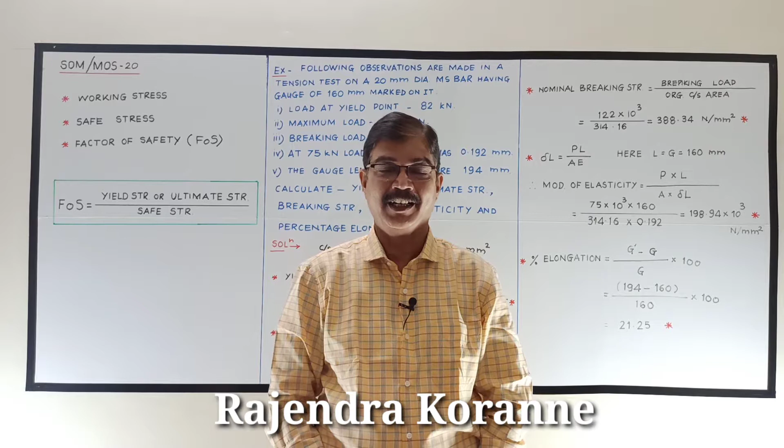In the previous video, we saw the stress strain curve for mild steel, cast iron and for deformed bar.

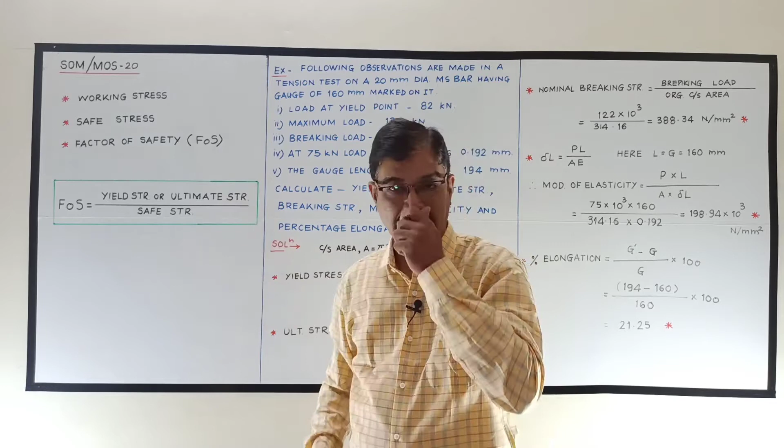Let us first see what we mean by working stress. The stress induced in the material of the member due to the actual load acting on it is known as working stress.

Now what is the safe stress? It is the stress in the material which can be withstood without causing any permanent deformation in that material. It means that safe stress shall not exceed the limit of proportionality or proportional limit.

As it is very difficult to observe the limit of proportionality accurately, the safe stress is based on yield stress or ultimate stress.

Now let us see what we mean by factor of safety. To calculate the safe stress, the ultimate stress or the yield stress is divided by a certain number, and that number is known as factor of safety. Therefore, the factor of safety is defined as the ratio of yield stress or ultimate stress to the safe stress. So FOS, that is factor of safety, equals yield stress or ultimate stress upon safe stress.

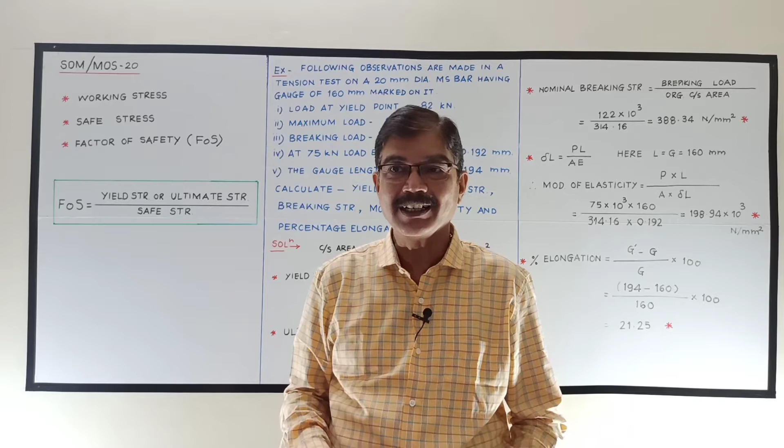So whatever may be the capacity of the member, it is always loaded such that the stress will be within the limit of proportionality. This is a very important aspect as far as design is concerned.

Now let us solve one example to understand deeply what is stress strain curve. Let us take the example: following observations are made in a tension test on a 20 mm diameter mild steel bar having gauge length of 160 mm marked on it.

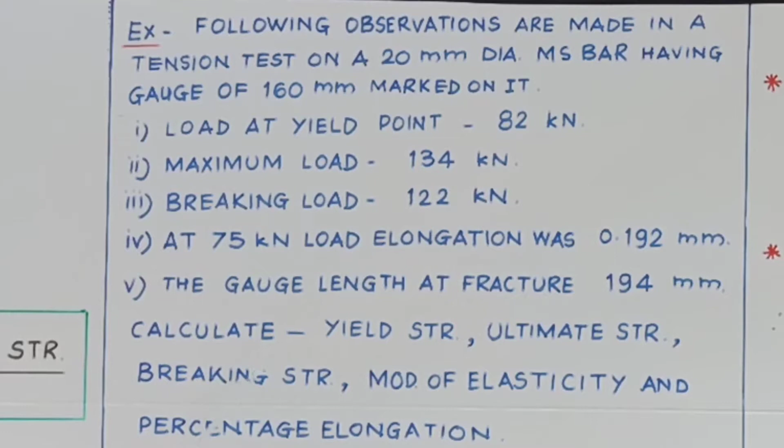Now what are the observations? Load at yield point 82 kilonewton, maximum load 134 kilonewton, breaking load 122 kilonewton. At 75 kilonewton load, elongation was 0.192 mm. The gauge length at fracture after breaking is 194 mm. We have to calculate yield stress, ultimate stress, breaking stress, modulus of elasticity and percentage elongation.

Now with the help of this example, you can very easily see how many loads are given here. 4 loads are given. When the load is applied gradually, the first load which will be reached will be 75 kilonewton, and at that load the elongation was observed. This particular observation will be very much useful to find out modulus of elasticity.

Then it will come as 82 kilonewton, that is load at yield point. This is before the proportional limit, and this is the yield point. Then 134 is maximum, and then the load will decrease.

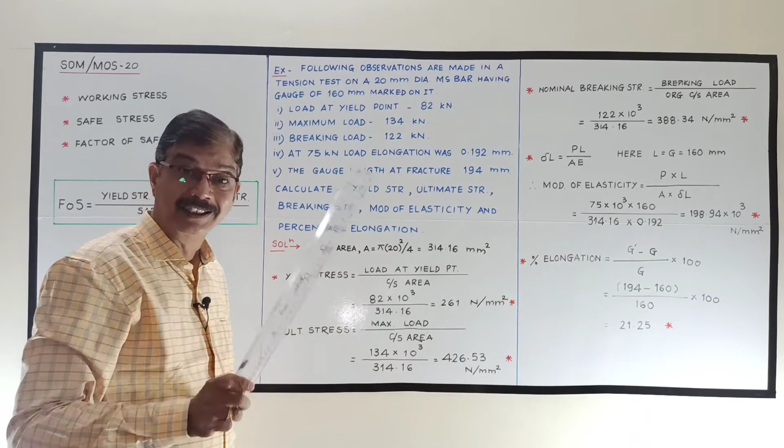This is a very known fact that breaking load is always less than maximum load. We saw this because once ultimate load is reached, the material starts reducing in cross section, thereby for further elongation it requires less load, and ultimately it breaks at a load which is less than the maximum load.

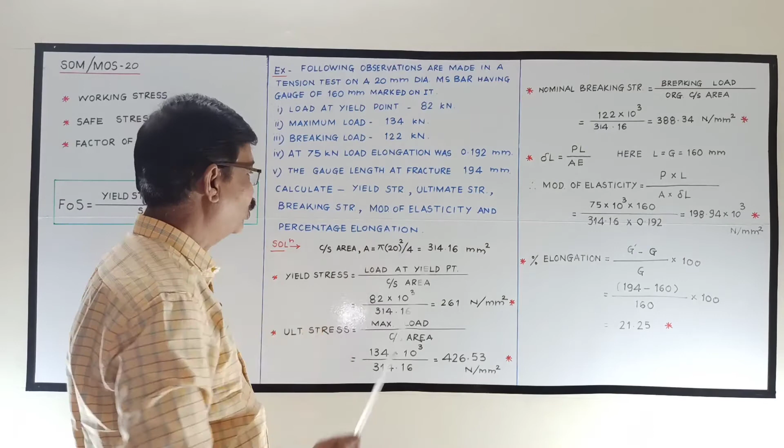Do you understand? Okay, now we have to find out so many things here. What are the things given? Original diameter is given as 20 mm, 160 mm gauge length, that is original gauge length. This is load at yield point, this is ultimate load, this is breaking load.

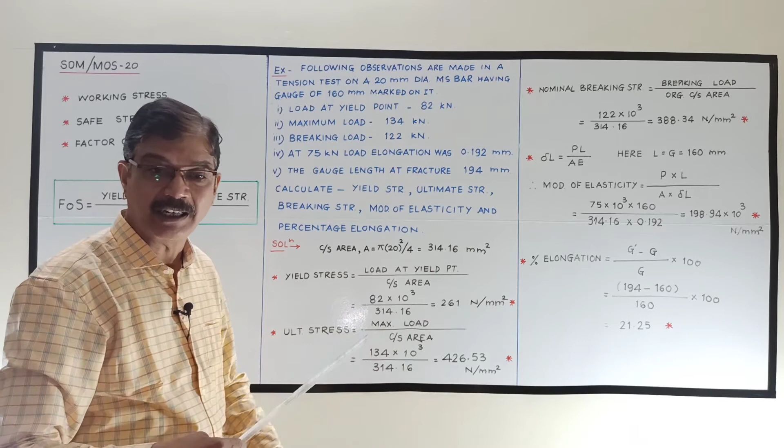For this particular load, elongation is given, so this observation is useful to find out modulus of elasticity, and final gauge length is given as 194 mm. After breaking, if you temporarily rejoin them, you can measure that G dash. So let us find out the things one by one.

Let us first find out the cross-sectional area, that is original cross-sectional area, pi d square by 4. Put the value of d as 20 and you will find that it is 314.16 mm square.

Now let us calculate yield stress. What do we mean by yield stress? Load at yield point divided by original cross-sectional area. Load at yield point is 82 into 10 raised to 3, for converting into Newton, divided by 314.16. On a scientific calculator, you will get that value as 261 Newton per mm square.

Now ultimate stress. What is ultimate stress? It is ultimate load, that is maximum load, upon original cross-sectional area. Maximum load is 134 kilonewton, divided by cross-sectional area 314.16, and this comes out to be 426.53 Newton per mm square.

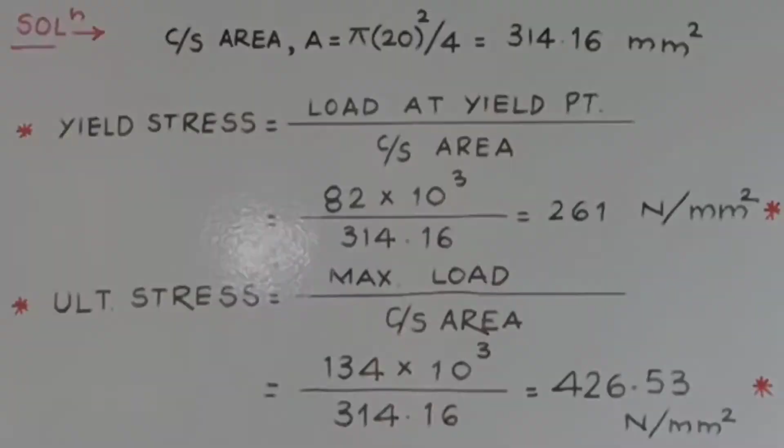Now the third thing we have to calculate is breaking stress. Breaking stress is of two types: actual breaking stress and nominal breaking stress. For actual breaking stress, you must be given the final diameter after fracture. It is not given, so we cannot calculate reduced area.

So in this problem, you are expected to calculate nominal breaking stress, which is breaking load divided by original cross-sectional area. Breaking load is given as 122 kilonewton. So 122 into 10 raised to 3, to convert in Newton, divided by 314.16, comes out to be 388.34 Newton per mm square.

Here you can easily see that the stress at which the specimen breaks is less than ultimate stress, because it is calculated using original cross-sectional area. If you take the reduced cross-sectional area here, this will be much more than ultimate stress.

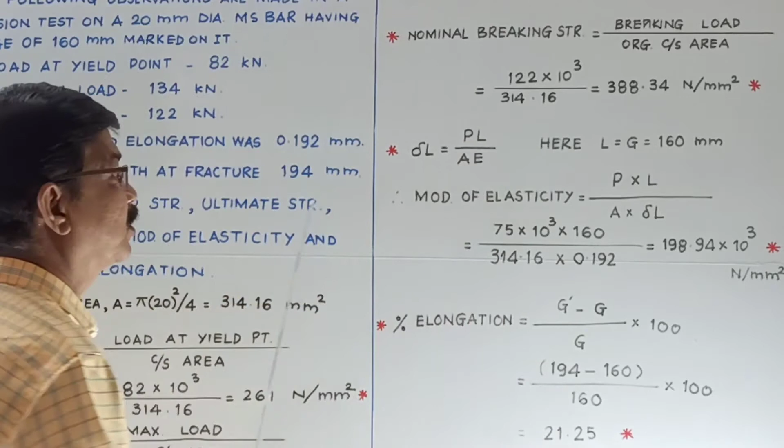Now we want to find out modulus of elasticity. For that purpose, the first load resisted by the material is 75 kilonewton, and at that load it was observed that elongation was 0.192 mm. That is delta L is given. What is the formula for delta L? P into L upon A into E.

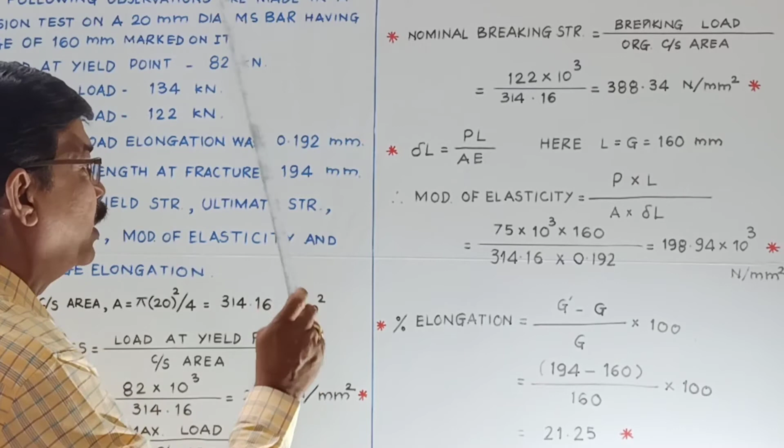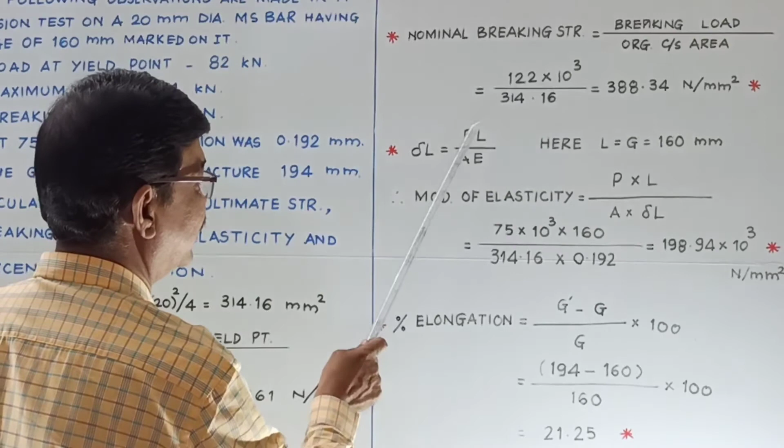What is L here? L means original gauge length, that is 160 mm. So I will take E here, delta L here. So modulus of elasticity will be P into L upon A into delta L. Substitute the values: 75 into 10 raised to 3 to convert in Newton, into 160, divided by area 314.16.

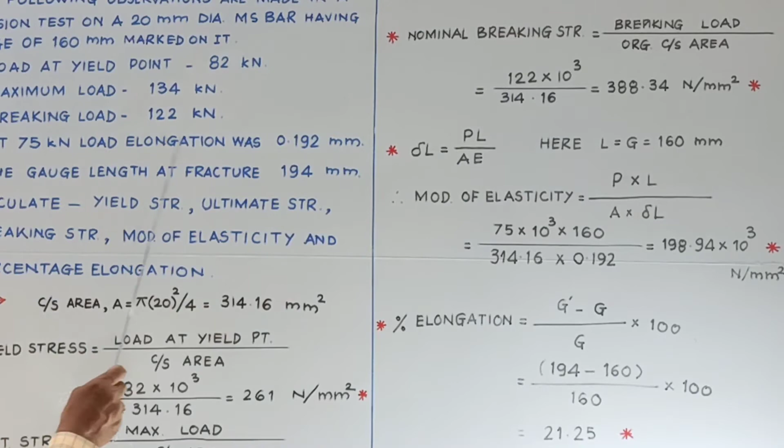And what is delta L? At 75 kilonewton, delta L is given as 0.192 mm. So dividing by 0.192, this comes out to be 198.94 into 10 raised to 3 Newton per mm square. We know the standard value of modulus of elasticity for steel is 190 into 10 raised to 3 Newton per mm square to 210 into 10 raised to 3 Newton per mm square, or 190 to 210 GPa. This is MPa, meaning Newton per mm square.

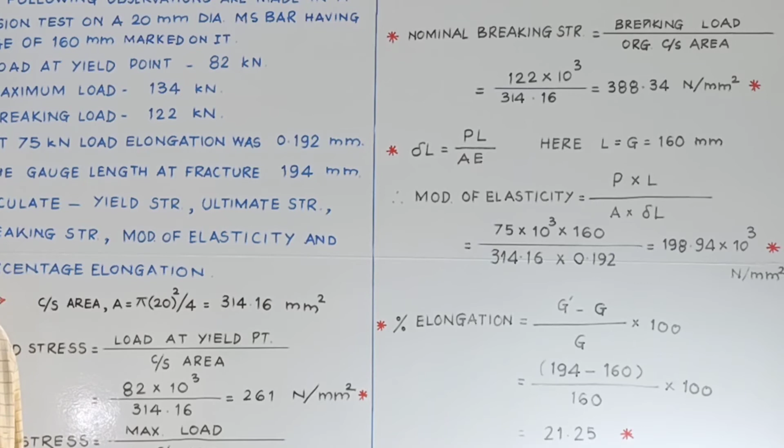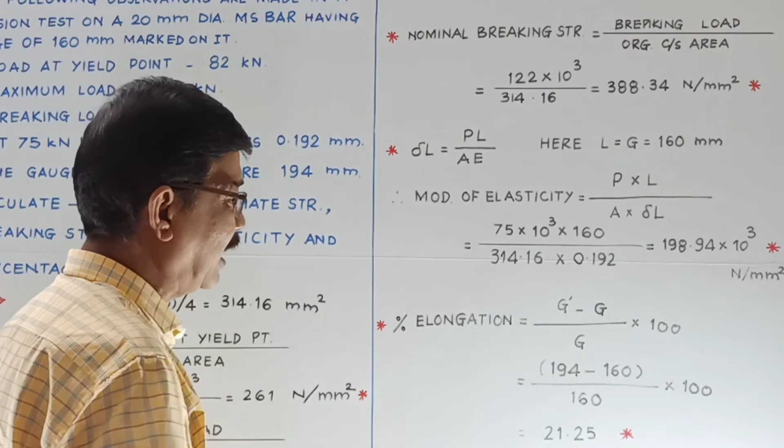Now the last thing we want to calculate is percentage elongation. Percentage elongation is the measure of ductility, the property of ductility of the bar, by how much percent it has elongated. This can easily be calculated as final gauge length minus original gauge length, upon original gauge length, multiplied by 100 to convert in percentage.

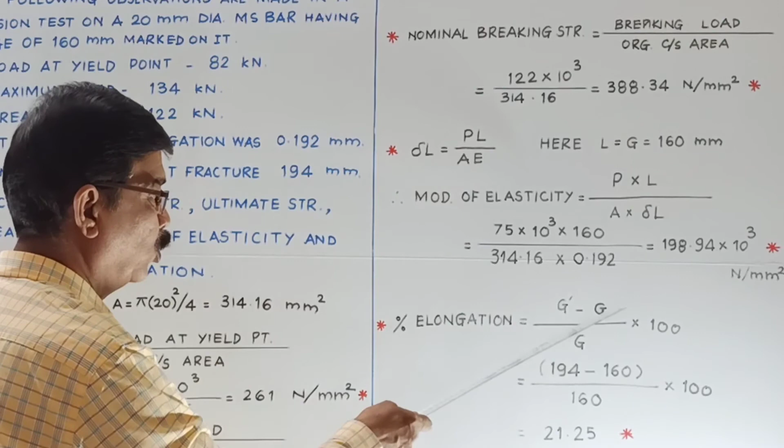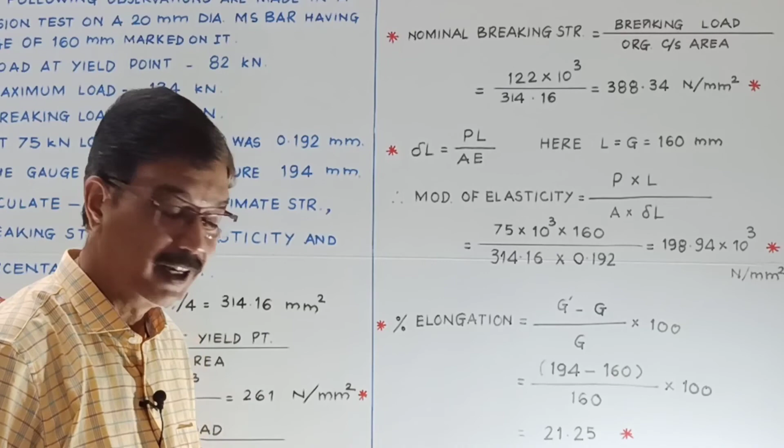Final gauge length, that is the gauge length at fracture, is given as 194. Original gauge length was 160. Dividing by 160 and multiplying by 100, it comes out to be 21.25. So this is the percentage elongation.

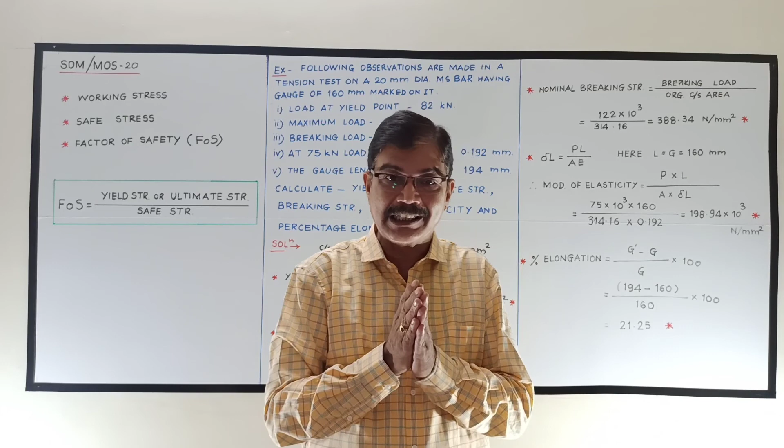So this is how we can solve the problem, and with the help of this problem, it becomes very clear how the load increases and what different changes are observed in the specimen, which can be easily understood with the help of this example. So with this we will stop here.

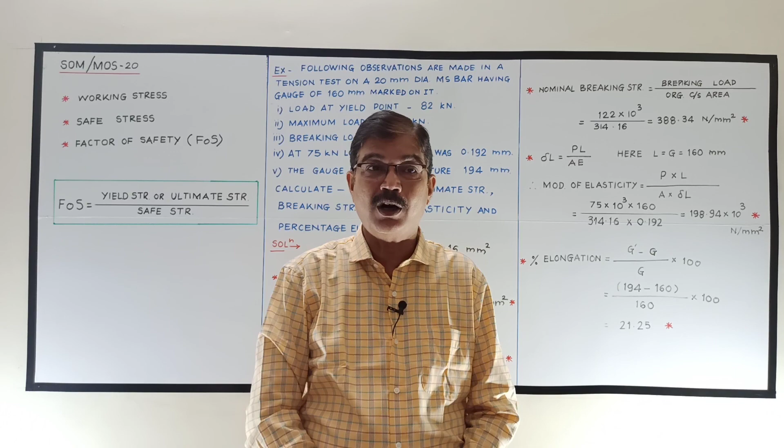In the next video we will see the stresses induced in bars of varying cross section. Thank you.